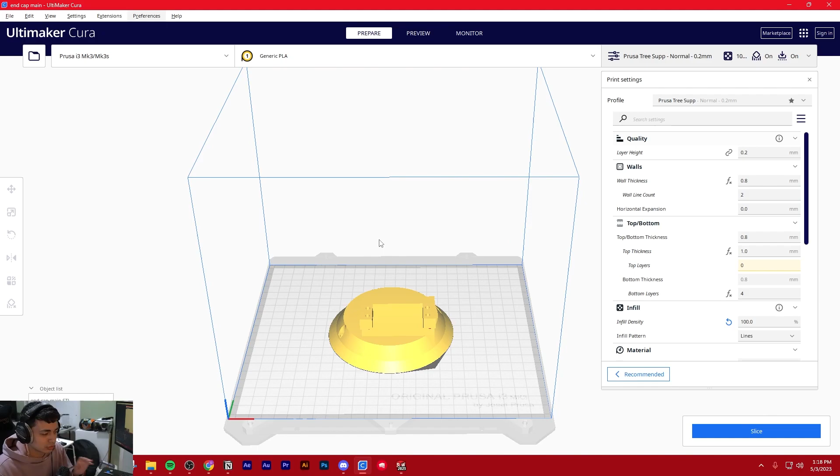All right, so I'm gonna go over all of the basic settings that you need to understand to be able to 3D print properly. So in Cura, once you're all set up, there are these three lines. If you click this down arrow, then there are these three lines here. This is basically showing you how many settings you want to see.

So if you don't want to be overwhelmed by all the settings, because there's a lot, I usually keep mine on all. But if you don't want to be overwhelmed, you could just click to basic. But just in case you don't know, I'm going to run through all of the basic settings so you guys understand. So probably the most important is layer height.

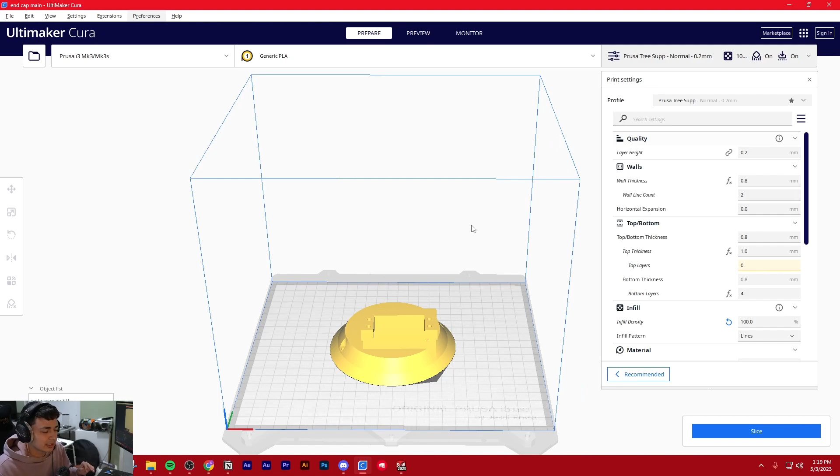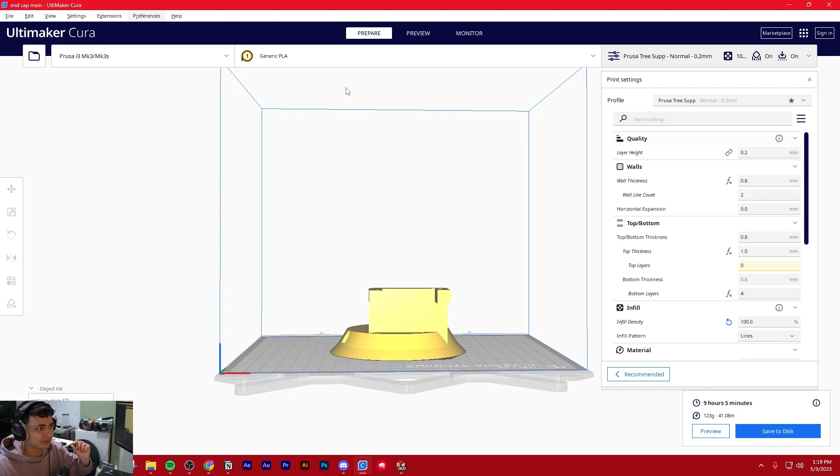So layer height is basically, if we're looking at this part from my Killjoy turret project, from the bottom all the way to the top, layer height is basically the thickness of the slice in the Z direction that you want your printer to print at. So smaller layers will basically give finer detail and make your part look nicer. Layer height will change all of these different slices.

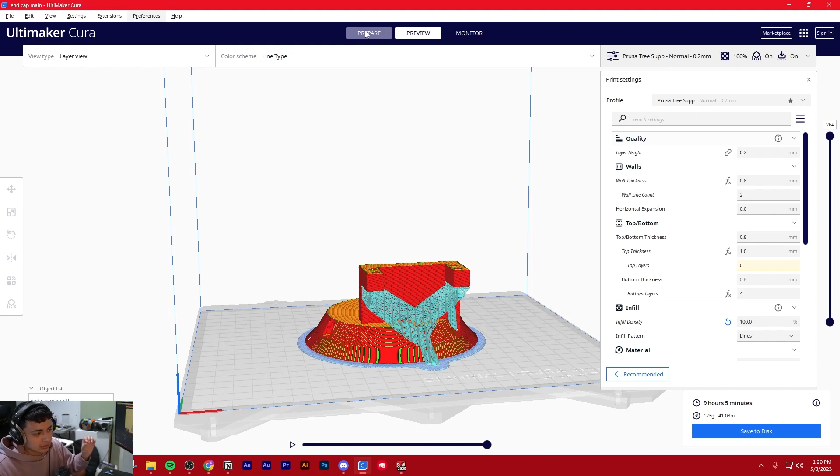So a larger layer height means that it will require less layers to slice up your part and it'll print faster, but the quality will be worse. And then the opposite is true. Lower layer height requires more layers, so it'll take more time to print. That is the biggest contributor to the quality of your part.

And then there's wall thickness. This is based on your nozzle settings, so I'll go over this a bit later. Infill density. So I usually keep mine at like 15%. 15 to 20% is pretty good for any run of the mill part. It'll get you by with 15%. You don't need to be printing super high infill.

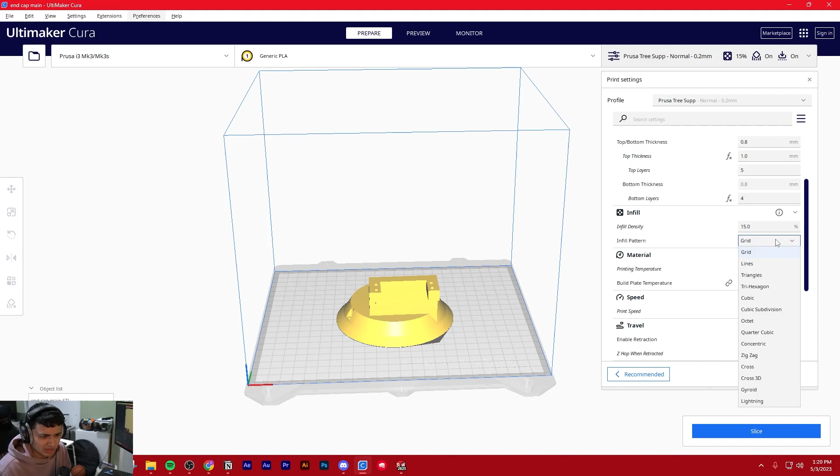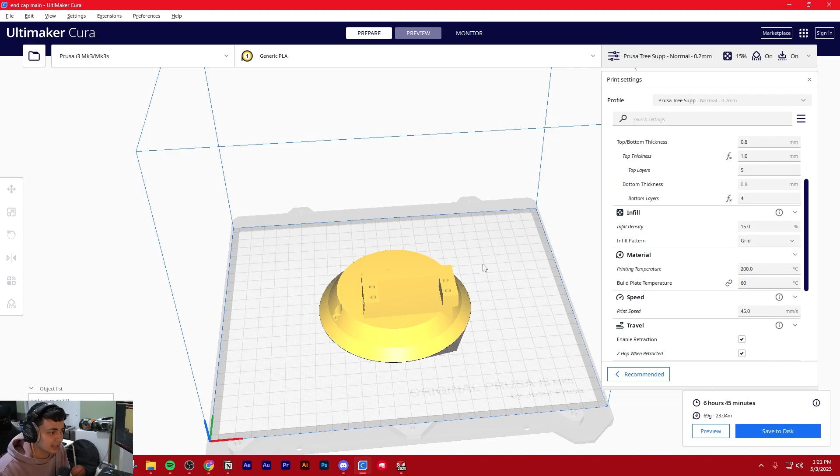You can save material and you could also play around with the different infill patterns. I just normally have mine on grid, but they have all these different sorts of infill patterns. So let me explain that to you just in case you don't understand what infill is. So basically in 3D printing, to save time and to save material, the slicing software Cura will keep a solid outside, but on the inside, where normally it would be solid plastic, it'll subdivide the part, so you see this cross hatching.

Instead of printing solid material on the inside, it'll print a certain pattern that is depicted by this infill pattern here. And there's all different sorts based on if you want it to be normal or strong in every direction. I think zigzag, or there's a 3D version that supports stresses in all different areas.

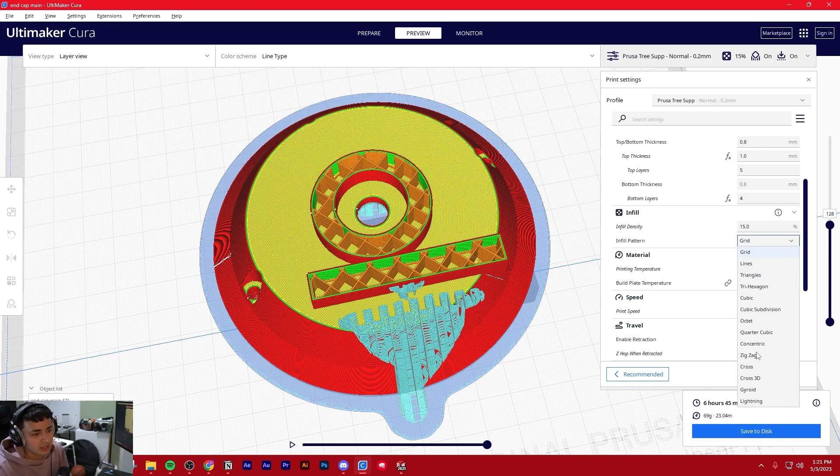There's ones that just look cool while it's 3D printing, and you could play around with all these different patterns and pick one that you want. I normally just keep it on default settings and put it on grid. But that's what's going on here. So Cura is trying to give you a depiction of how it's printing at each layer.

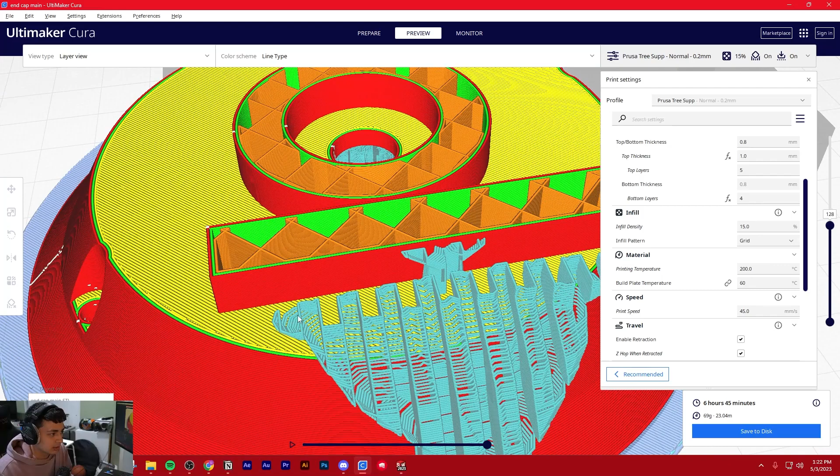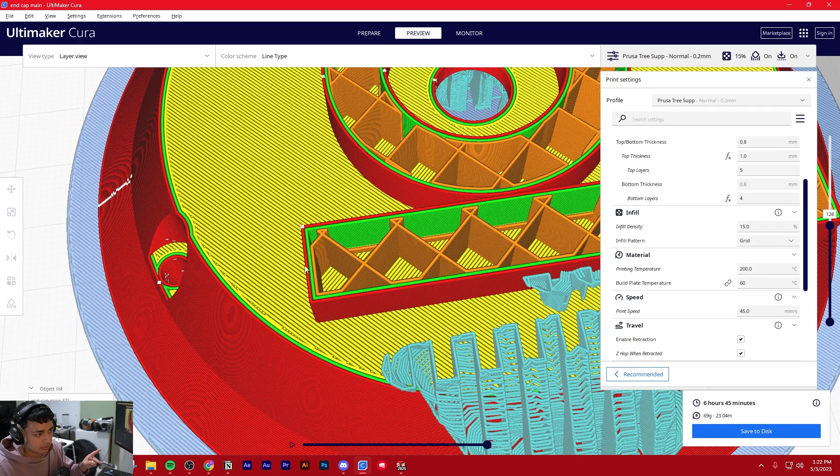So the blue stuff that you see here is the support, and then the red stuff is the outer wall of your part. So right here it's saying it's going to print two walls. Each perimeter around a piece is a wall. So the red perimeter is your outside wall, that's one wall, and then the green wall is your inside perimeter. So you get two walls, and that's based on your nozzle diameter.

So if you're printing at a 0.4 nozzle diameter, which is what default is, then your walls are going to be 0.8 millimeters thick, because that's what this is here. So you have two walls printing at a 0.4 millimeter nozzle laying right next to each other. So that'll be 0.8 millimeters.

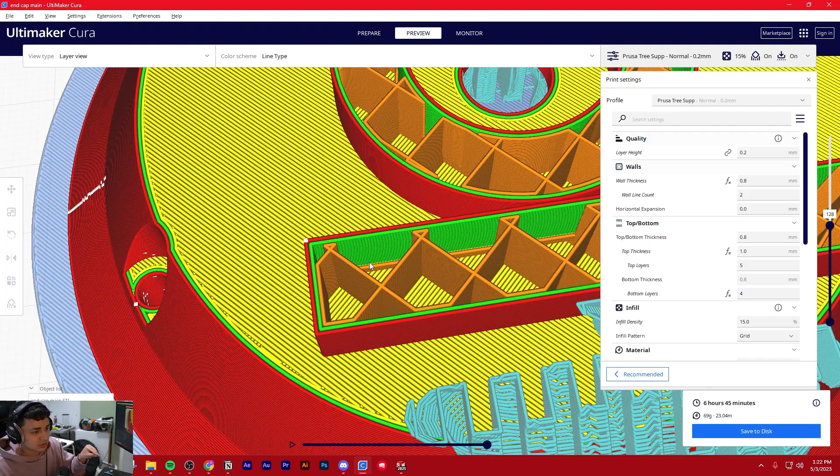And then instead of printing solid on the inside to save material and increase speed, it's going to print an infill pattern. And the higher infill that you print at, the more dense, or the more plastic there will be on the inside.

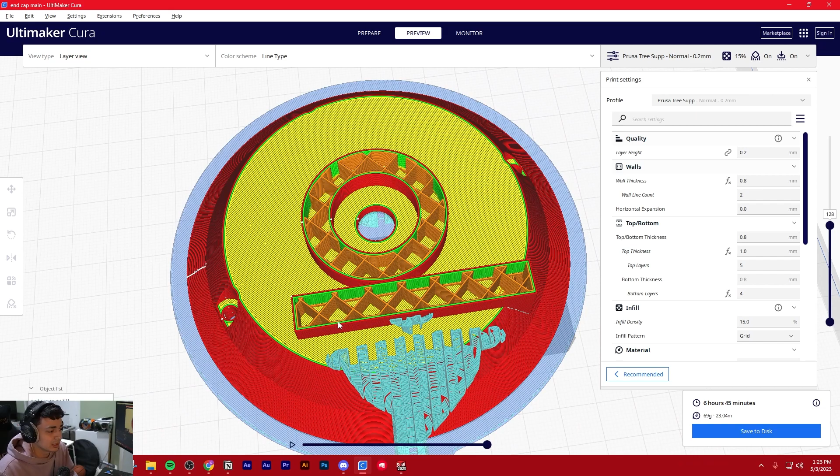Unless you're doing something where you need a super strong part, then maybe print at a higher infill. Sometimes, very rarely, I'll need a really strong part, so I'll just put it on 100%. But otherwise, you're pretty safe to run at 15 to 20%, and that's a good way to save weight too, if you need a lightweight part.

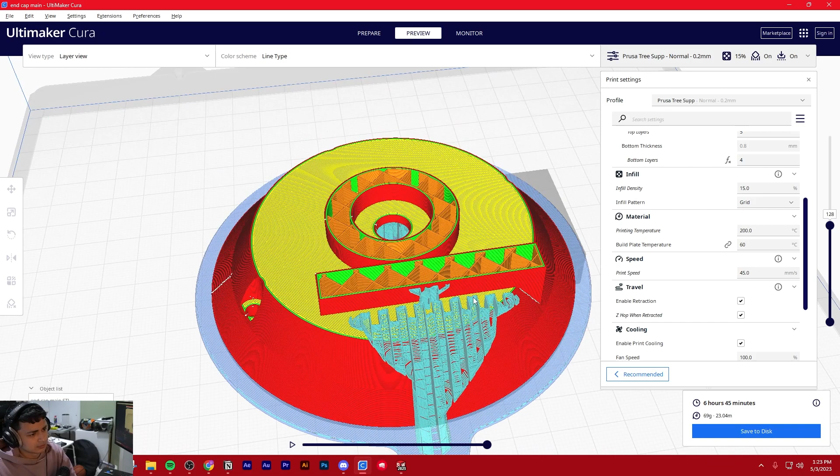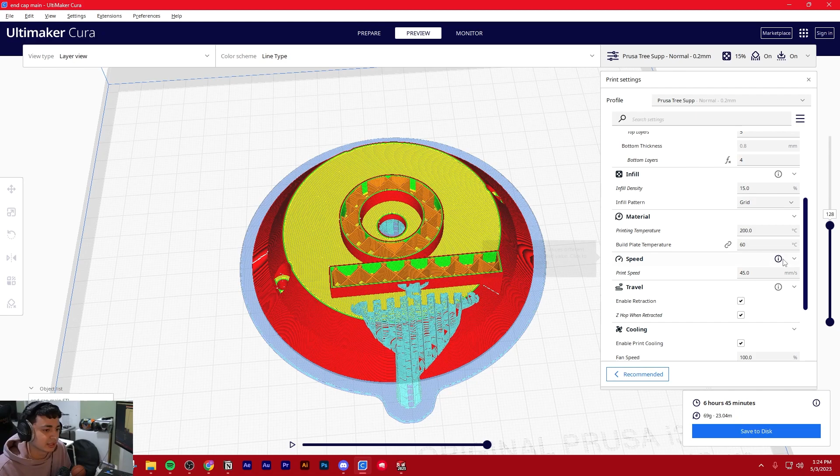What else? Printing temperature. If you're printing normal PLA at a 0.4 millimeter nozzle, 200 to 210 degrees C is pretty run of the mill. If you're experimenting with materials, usually it'll say it on the box; every manufacturer is different and will recommend different temperature settings. I usually keep my bed at 50 to 60 degrees. That's normal for PLA.

I don't really touch print speed. In my experience, the default is pretty good, and although you can increase it, in my opinion it doesn't affect speed that much. In my experience, it would only really decrease quality. The biggest impactors for speed are if you can raise the layer height and how many walls you're printing, which I'll go over in a sec.

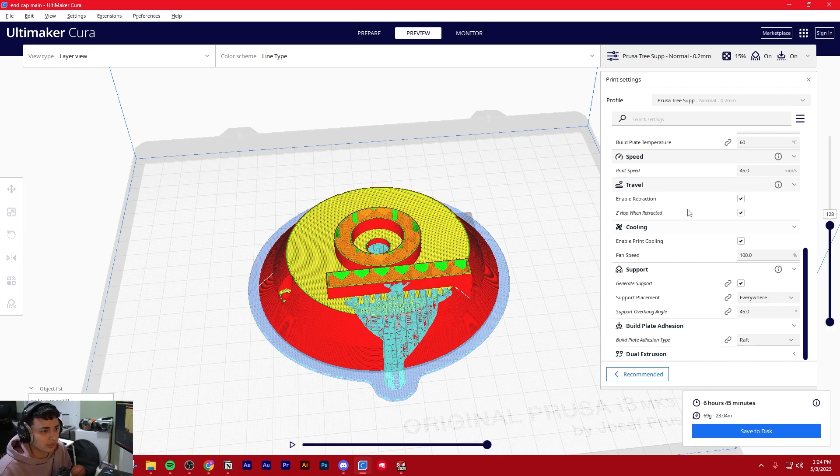And then support. Oh, sorry, I skipped something. Retraction. Make sure you have enable retraction and Z-hop when retracted checked. So basically, say for instance the print on this layer goes all the way around this. Let's say the nozzle starts where my cursor is. It goes left, down, right, up, and now it's got to do a layer on this circle.

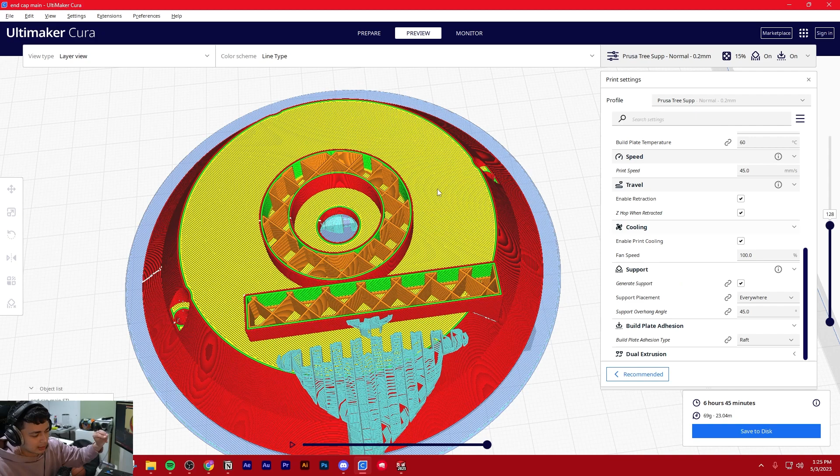So if the nozzle finishes at this corner once it goes all the way around, it will stop depositing material, pick up off the build plate, travel quickly to the circle, plop back down, and start printing again. So that's what retraction is: stopping the depositing of material, pausing, and then quickly moving.

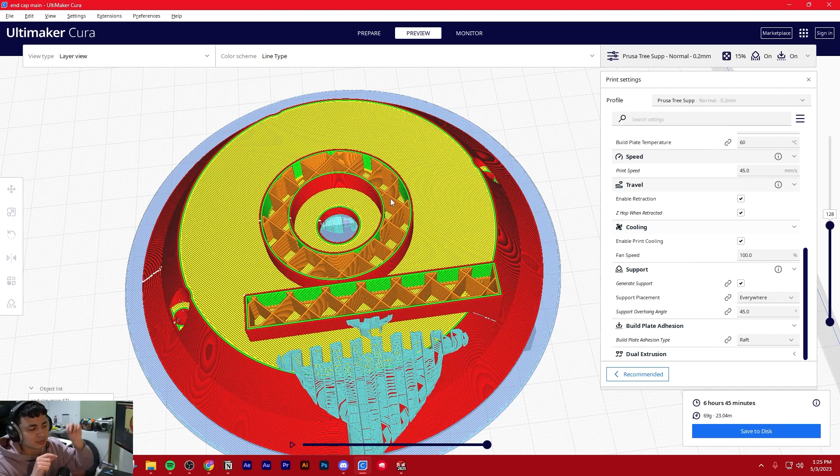Sometimes if you don't have retraction and you just try to drag over to the next area you need to print, you'll get stringing, which is basically leftover material from the nozzle because it still thinks it should be printing, and it'll seem spider webby. So retraction greatly increases quality, and Z-hop when retracted also helps too. That'll pick it off the surface, go to the next spot, and then move back down and deposit.

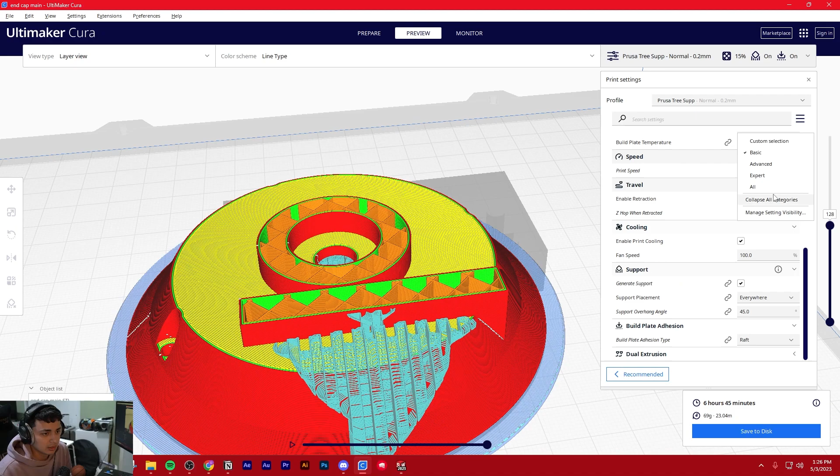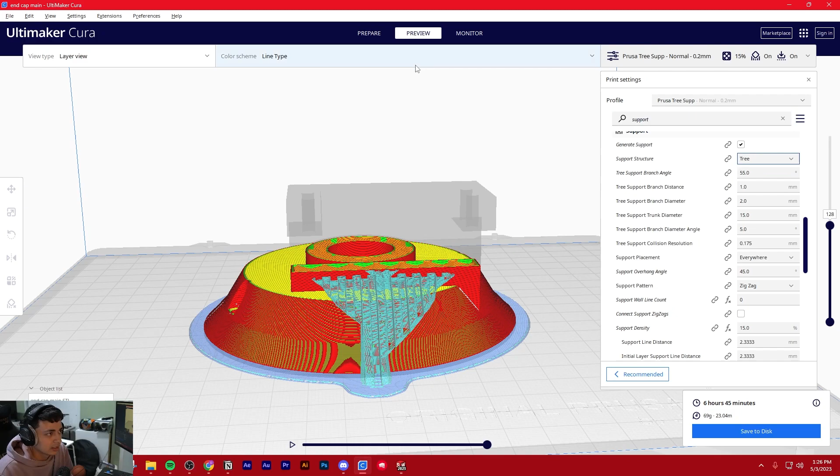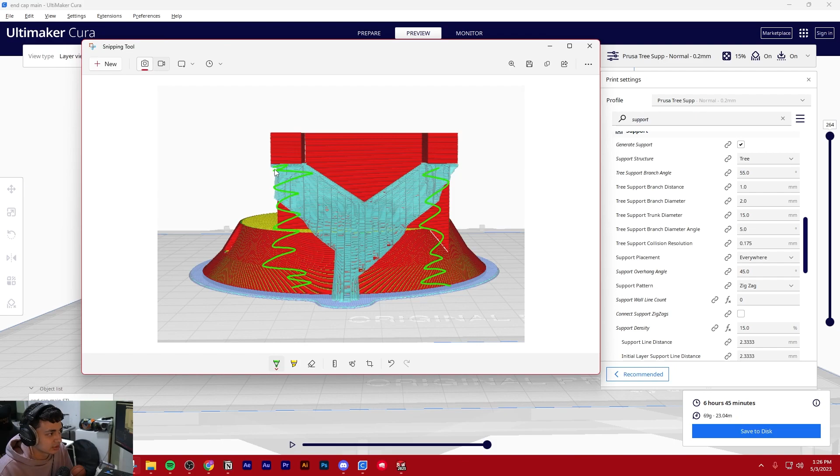Generate support: I always use support, and specifically Cura is great because you can use tree supports. So if you press all and then go to support, you can set support structure to normal or tree. You see how this is literally kind of like a tree branch. Here, let me take a screenshot. Normal support would print material below anything that has an overhang, so probably all of this would get support, and all of this.

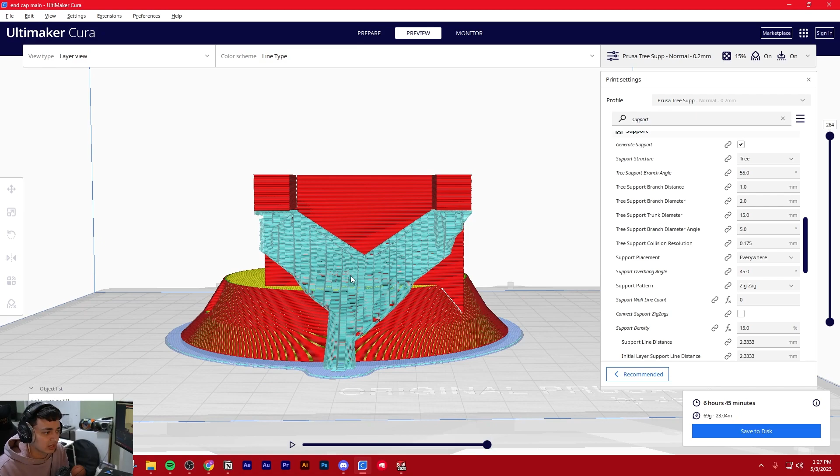But with tree supports, it tries to do the math to figure out the minimal amount of support it needs, because you can print at angles with 3D printing with no issue. So it's saying, if I do a little base here, come up, and print at this 45-degree angle, that'll save a lot of material because I don't have to support directly under the areas that need support. It can combine supports in different branches so they come together.

Tree supports are also really great because if you do them the right way, they just pop off. Sometimes with supports, they'll be too close to your part and won't want to pry off. But I love tree supports. You might have to do some fine tweaking to get it the way you want. Here, let me see.

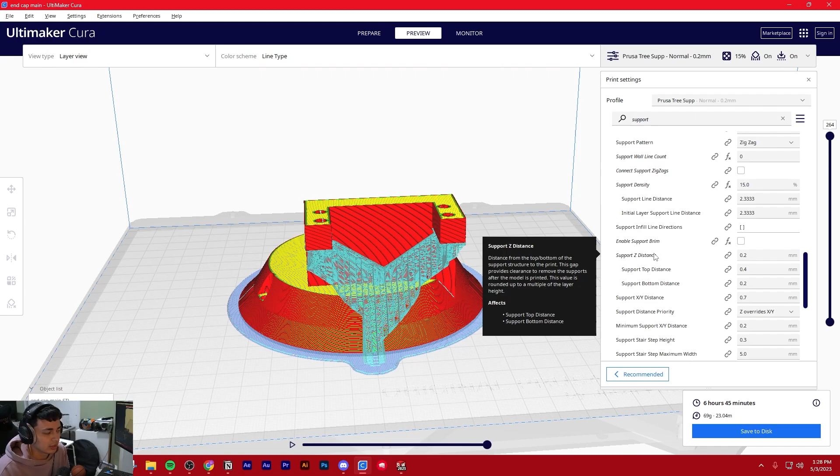So this is a big one. If your support is getting stuck to your part and it's not coming off too clean, support Z distance is a big one that you can play with. That's basically modifying the...

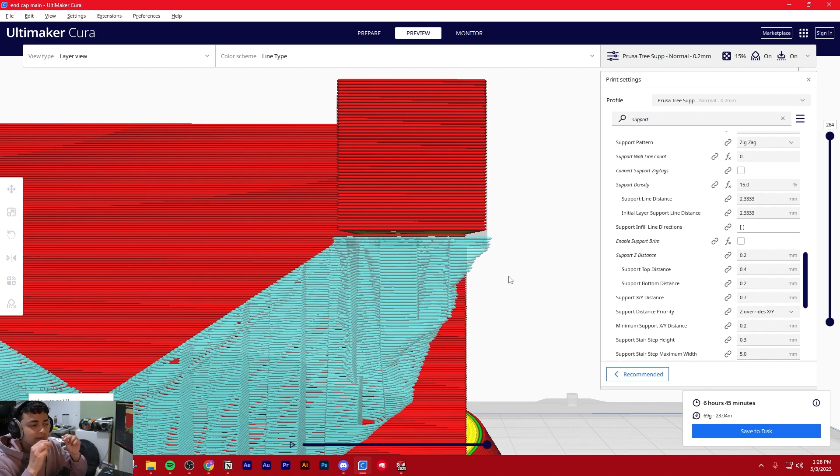So here in the software, it looks like the blue is touching the red part, but if you zoom in, it's telling the printer to not actually put them right on top of each other because they're gonna do that anyways. So you leave a small air gap, and that decreases how much overlap the parts have, so your support can just pry off basically. So that's a good setting to tweak if your support isn't coming off too well.

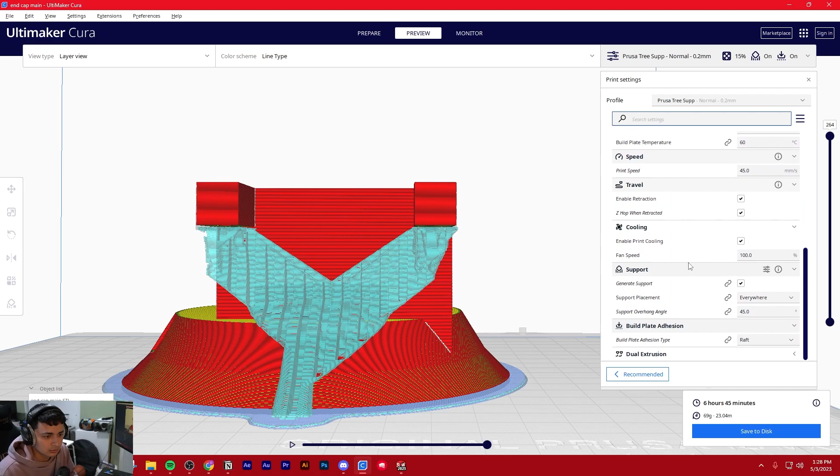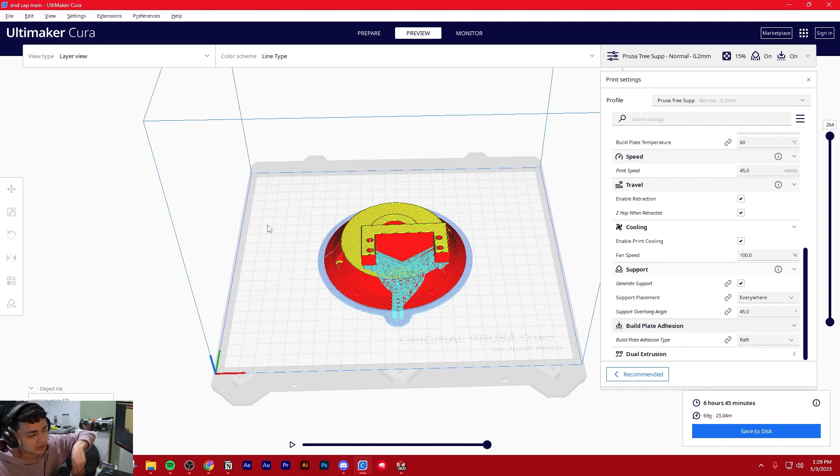And then from there, what else do I use? I'll go back to basic. Deselect support. Oh, and then I use rafts. So what rafts are, basically when your printer's warming up, once your nozzle gets hot enough to start depositing material, it'll move around and maybe do a few strokes, just let out some material to clean the nozzle, make sure it's ready for printing.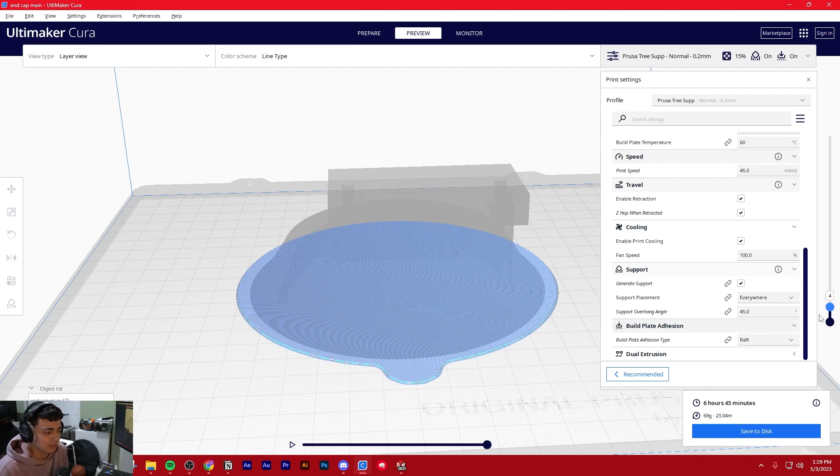But after that, I use raft. So raft is basically this mat. Before my part even starts printing, it's just these couple layers that form a perimeter around your part, and it's a raft or a mat, and it's just sacrificial layers that will help your part adhere to the build plate. A lot of people use glue stick instead of rafts, but it's kind of messy. I like using rafts. I've never had an issue with it. It really helps my parts adhere to the build plate.

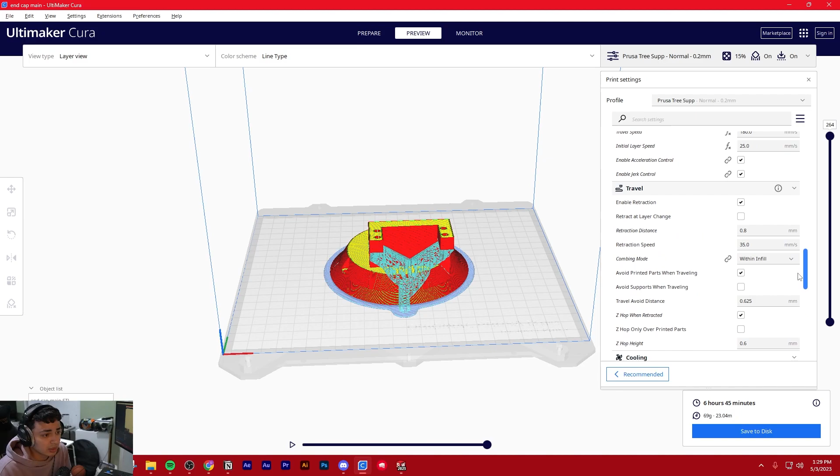What else is there? I'll just go to advanced, make sure I'm not missing anything too important. That's basically the gist. Those are probably the most important settings that you'll need to understand. Obviously, from there, if you're having particular issues, you could ask me questions, and I could help you fine tune things, or you can go in and experiment. Like, oh, what does changing this number do? Maybe you can figure it out just by the slicer. You can test print it and see how that works. But those are probably the most important settings to go over.

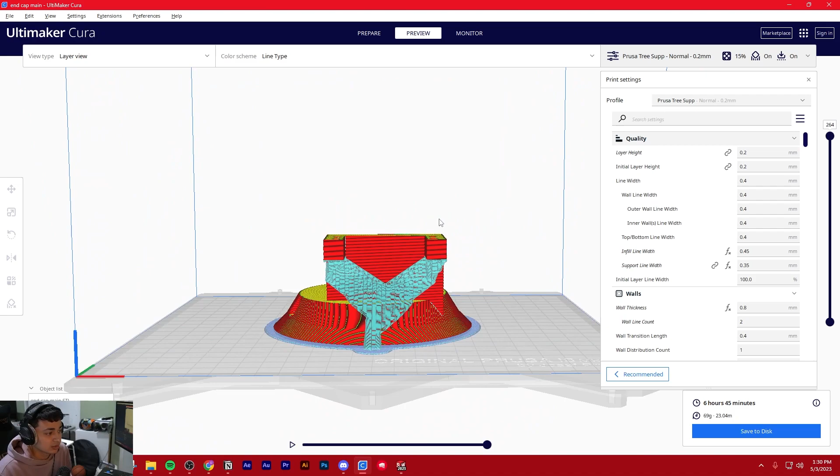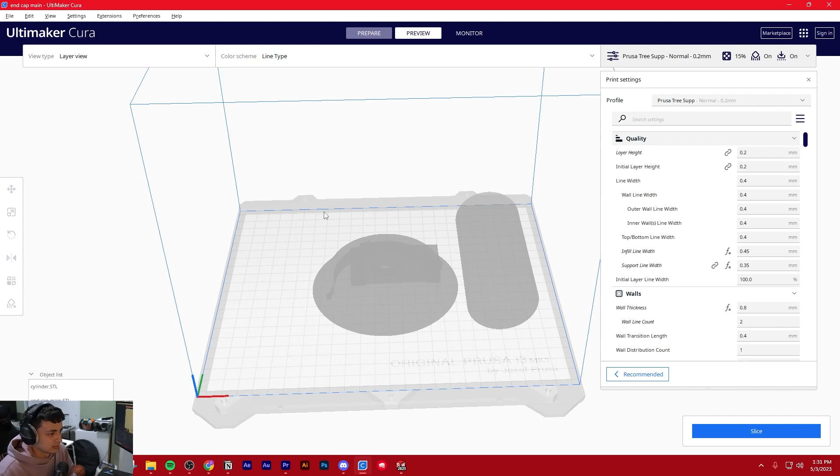Oh, and then the last thing I wanted to show you is, I've made this folder of modifiers, is what I call them, and they're basically just cylinders, and I have a cube. I'll just bring in the cylinder, and then I'll resize it and move it to where I want and make it smaller. Sometimes for my projects, I'll use thread forming screws, right? What that means is the screws will bite into the plastic and form their own threads. But to do that, you need enough plastic for the threads to bite into. Let me explain what that means once this slices.

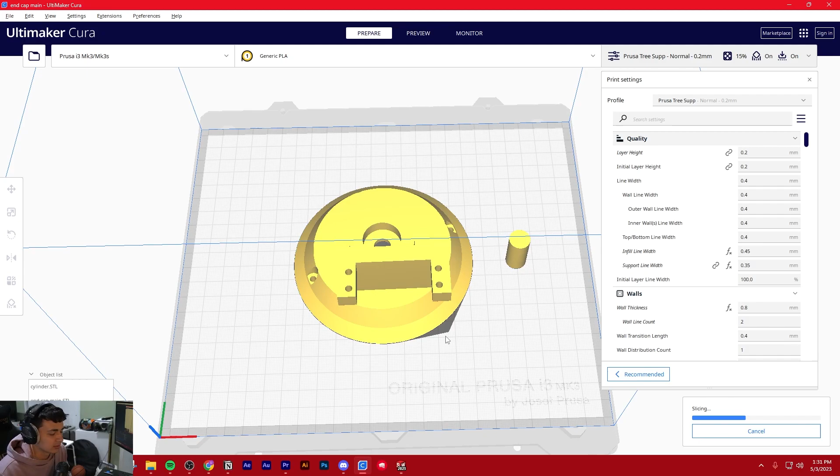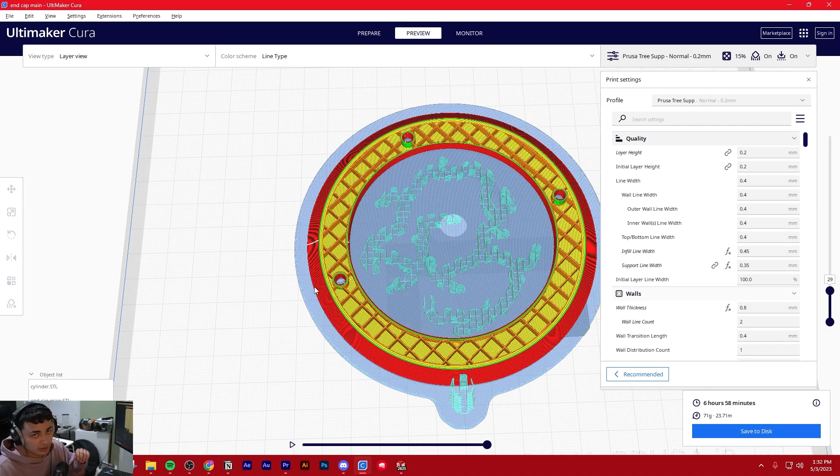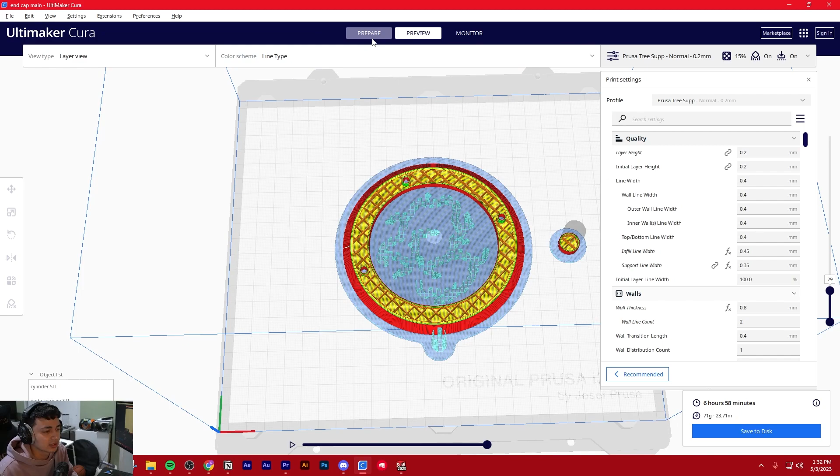So for this particular design, I have these cylindrical holes here, and I'll be running thread forming screws through there. So they're going to be biting into the plastic and taking away plastic to form threads. But here, I only have, what is this? One, two, I have 2 walls at a 0.4 millimeter nozzle. So 2 walls times 0.4 is 0.8 millimeters of material. That's a pretty thin wall to take plastic out of. 0.8 millimeters isn't very thick.

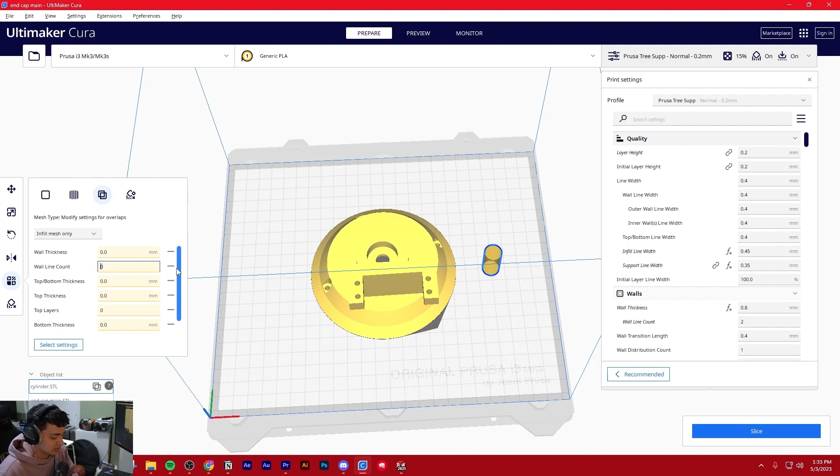So right now, I don't think there's a setting where you can just say, hey, add extra walls to all holes, but there is a workaround. I'll share these modifiers with you if you want to use them in your projects. The way I do it is I'll drop in a modifier and size it to the size that I want and position. Then if you click it, go to per model settings, then modify settings for overlap, and I'll just change this to like 6 or whatever. Now you can see it's sort of translucent. Drag it to the position that you want it.

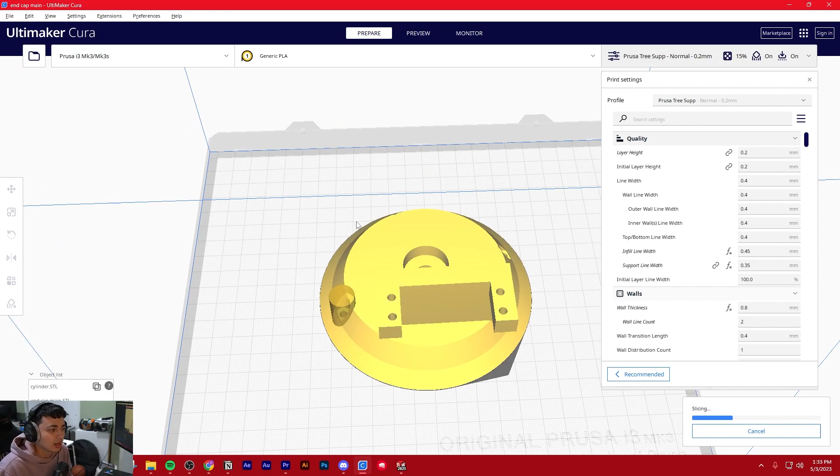So now anywhere that this cylinder overlaps with my part, it's going to add extra walls. I'll do that for all my holes where I know I'm using big thread forming screws that are going to take away extra material. I'll use those to add extra walls or extra material so the thread forming screws can take enough material without breaking my part.

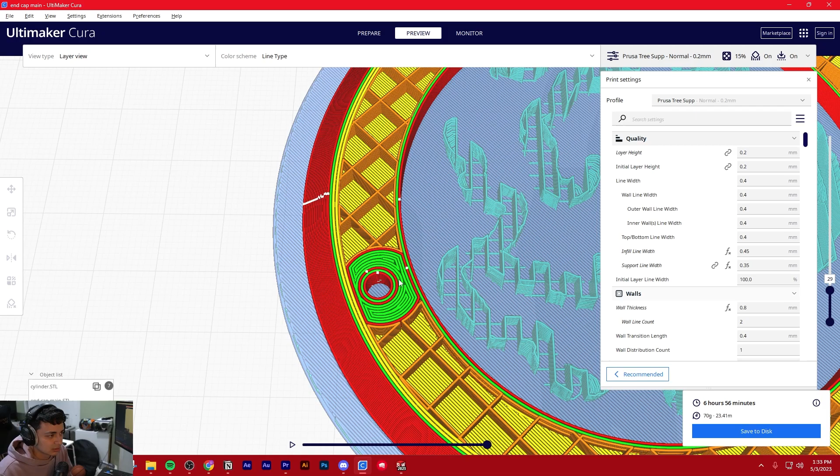So now you see the hole has plenty of walls and plenty of material to take out compared to this one that only has 1, 2, or in some areas 3 walls, some parts have 2. So that's way thinner compared to this. So doing this greatly increases the amount of material you can take away.

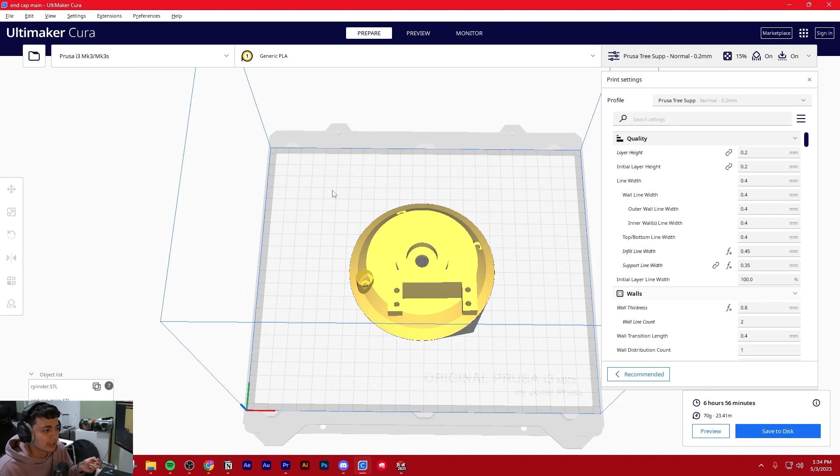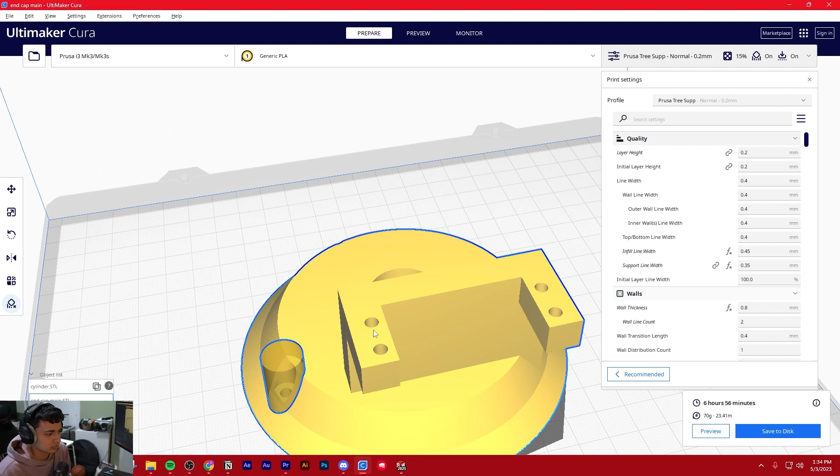And it's also good for heated inserts that I'll talk about in this course, because that's also going to be taking material away by melting hardware into your part. And then built into Cura are support structures. So these are great for blocking material. Let's say these red areas are indicating where support will be.

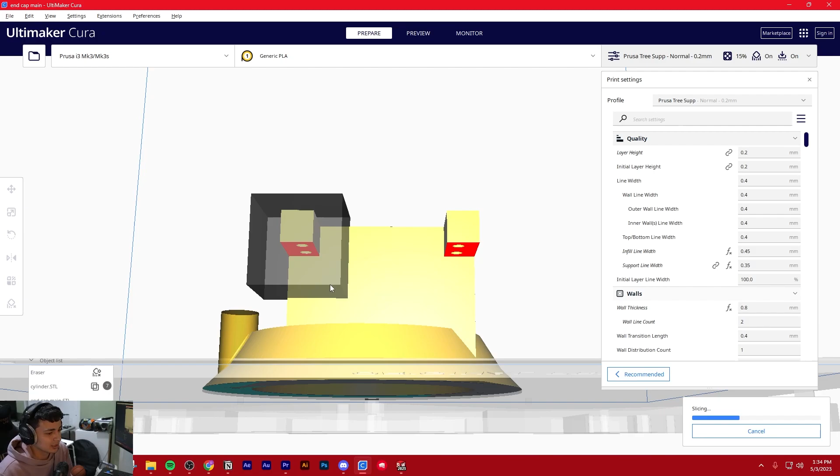I could put a support blocker here, and then if you left click the support blocker, you could modify it like it's a normal part and say, hey, don't put support here. Let's say you wanted that area of the part to be super clean and you knew that it didn't have to be supported anyways, I'm just showing you an example. Cura will then know, hey, let's not put support here, and let's move around that.

So if I look at the slicer now, you'll see there's no support here because we blocked off that entire area, but it did put support over here where we didn't put a support blocker.

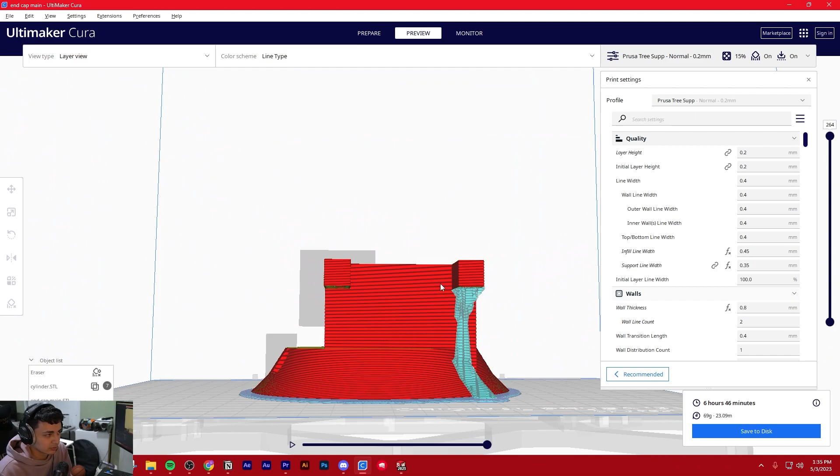Okay, so in terms of print settings, I'm gonna go over two sets of print settings, and I'm also gonna give you my print profiles just in case you have a Prusa Mark III, an Artillery Sidewinder X2, or a CR10S Pro V2. You could just import it and use exactly what I have, but it's nothing too crazy. I've tweaked some stuff, but it's mostly the default after you import a printer into Cura. I'm gonna make this basic just so we're not overwhelmed here.

I'll go over my Prusa. My Prusa prints on a 0.4 millimeter nozzle, and I usually print at a 0.2 millimeter layer height. 20 is a little high; I'll usually print at like 15% infill. For a 0.4 millimeter nozzle, you can do anywhere from 200 to 210 degrees for the nozzle. 60 is about the default that I use for the build plate. Print speed at 45 millimeters per second.

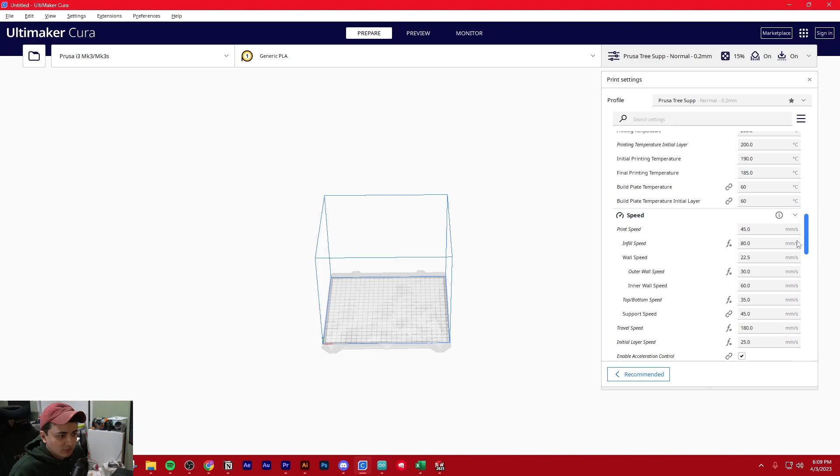I use retraction. I also use support, specifically tree support. So if you go into advanced, and then go down to support structure, you can make tree, and you could copy my settings if you'd like.

I also use raft. So basically when you're printing, instead of printing directly on the print bed, it's going to print a couple sacrificial layers that make a base that your part can stick to. That makes it so that you won't have any issues with your first few layers, and you'll get really good adhesion. So you don't have to worry about your part flying off the build plate, which I love.

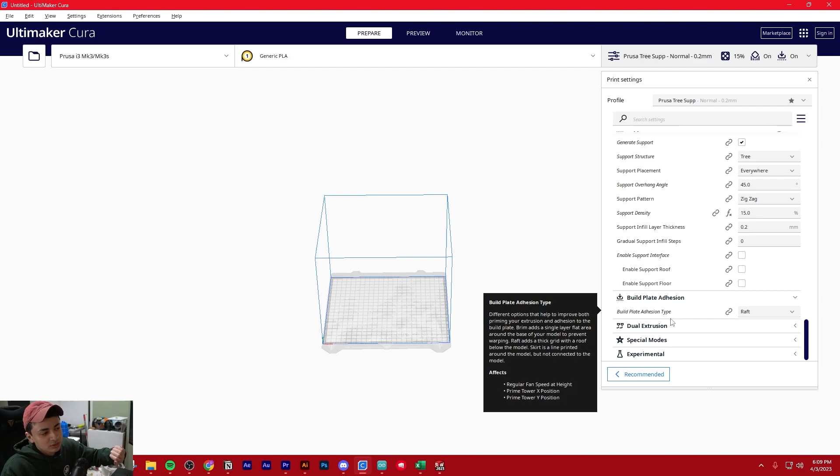But the only issue there is you have to tune in your rafts so that they are easy to peel off your parts. Because if they're not, then you're going to spend time peeling your raft off of your part. But I've spent some time tuning that. Maybe if I go into expert, it'll show my raft settings.

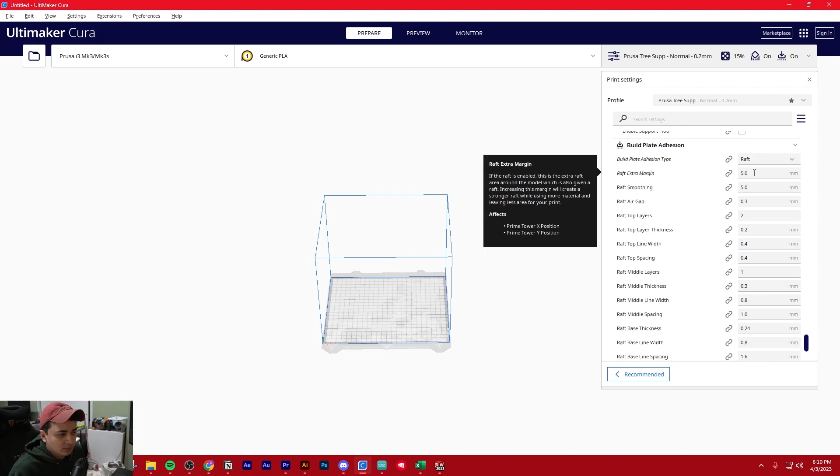So you can see raft extra margin is how much beyond your part it's going to extend. Raft air gap is the big one, so that it'll leave a tiny air gap between the bottom of your part and the top of the raft, so they're easy to separate. So this is a good number to play with to make sure your parts are easy to rip off of the raft. And that's pretty much it. You can fine tune some of this based on whatever issues you're seeing in your prints.

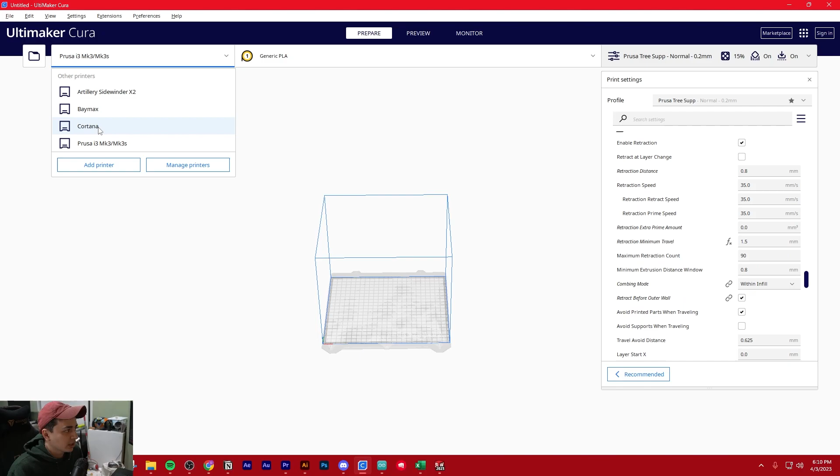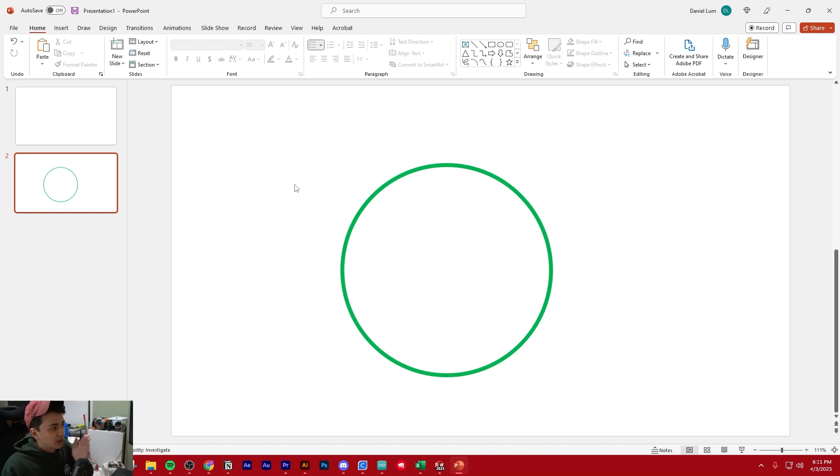But the other thing I wanted to explain was for my two CR10S Pro V2s, they're a little bit larger printers, so I equipped a 0.6 millimeter nozzle. The benefit of that is that I can print faster. Okay, so let's pretend that I have a 0.4 millimeter nozzle, and I'm printing at 0.2 millimeter layer height.

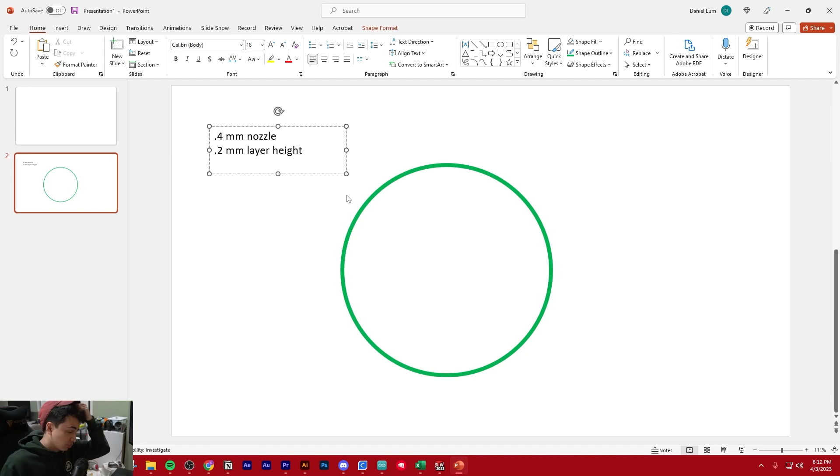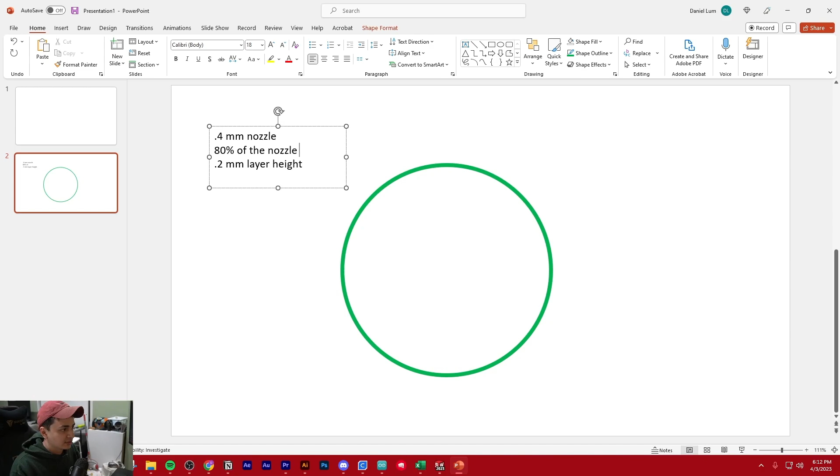So the rule is that, here, how do I do a text box here? So 0.4 millimeter nozzle. I usually print at 0.2 millimeter layer height, but the rule is that, in terms of layer height, at maximum you can go to 80% of the nozzle diameter for your layer height. So if you were printing at a 0.4 millimeter nozzle, the highest you could go would be a 0.32 millimeter layer height.

At maximum. But in terms of a balance between speed and fine detail, I think 0.2 millimeters is really good for 0.4 millimeters. And the other thing too is, if you're gonna increase the layer height, increase in increments of 0.04. So right, this is 0.20. If you wanted to increase the layer height, you could try 0.24, 0.28, or 0.32.

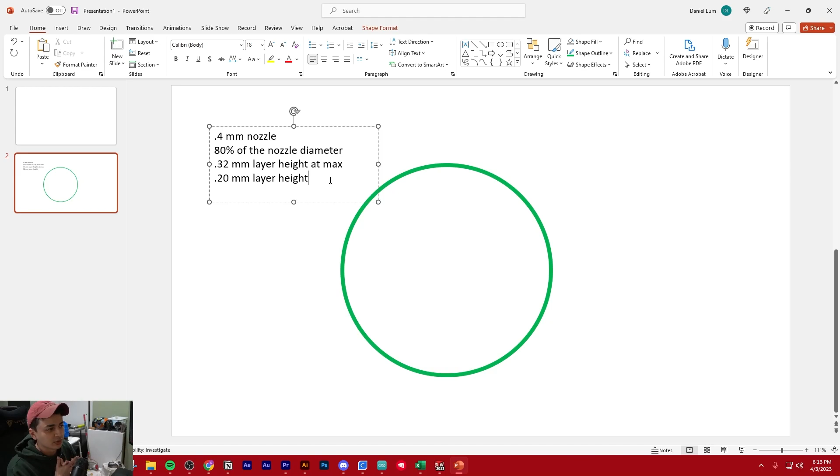There's some magic math that goes on between the amount of steps in the stepper motors or something like that that I've read that allows for those specific layer heights, the intervals of 0.04, to be more optimal for printing resolution. So the other thing I want to explain here is, let's say you're in this scenario, and let's say I'm printing a vase or something. So it's hollow on the inside, but it's got wall thickness.

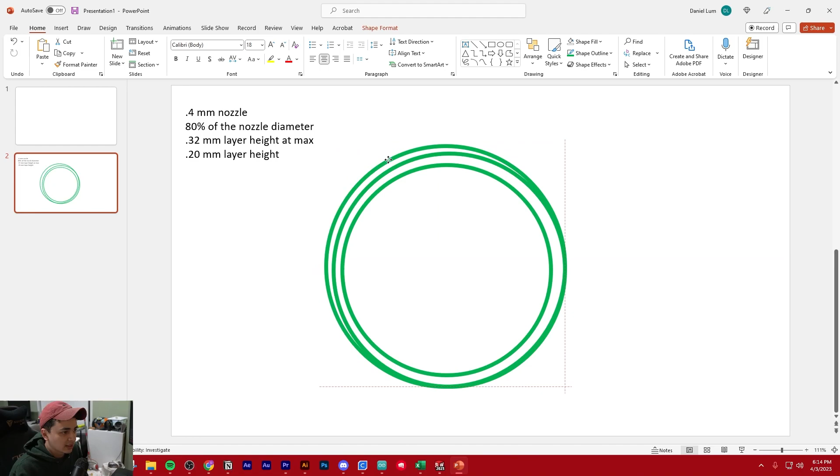So if I were printing at a 0.4 millimeter nozzle, these are called shells, which is basically like if you just had a wall, and the inside was hollow. So all of this on the inside is hollow, and then you have some wall thickness here. For a 0.4 millimeter nozzle, you probably want 3 roads or 3 shells. So basically to make a wall, it would take 3 passes all the way around.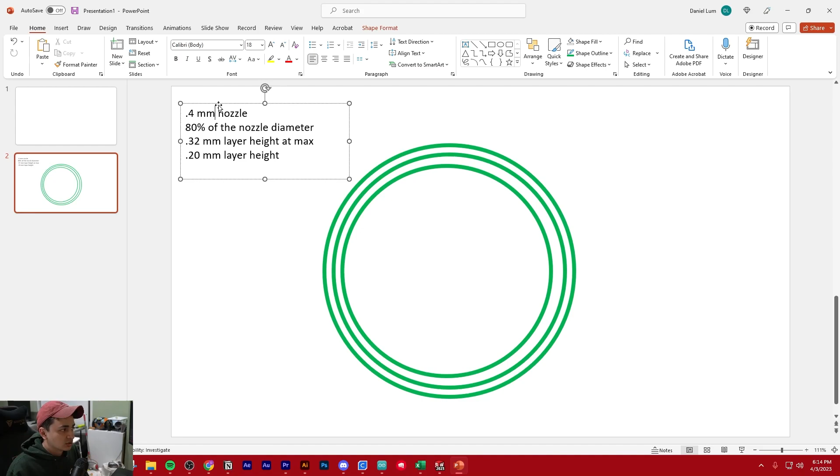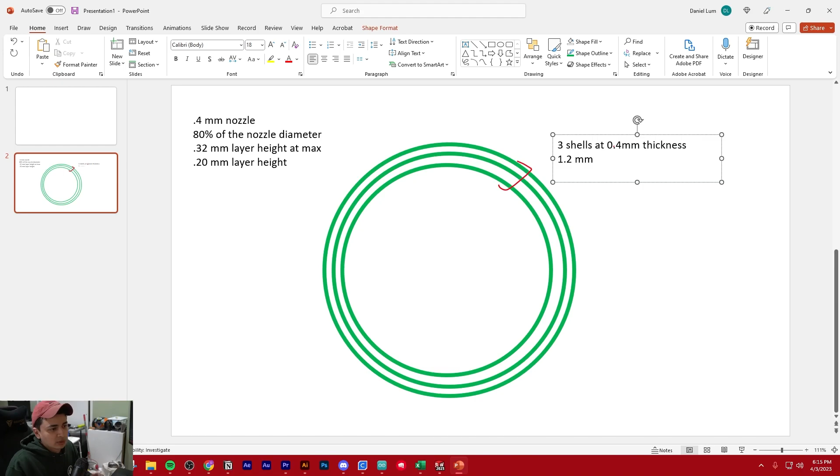So let's do some math. If you're trying to figure out the total thickness and you have 3 total roads or shells, 3 shells at 0.4 millimeter thickness would be 1.2 millimeters. So in this specific example, for a 0.4 millimeter nozzle, I'll usually print at a 0.2 millimeter layer height for a balance between speed and resolution. You could go up to 0.32 millimeters at the maximum.

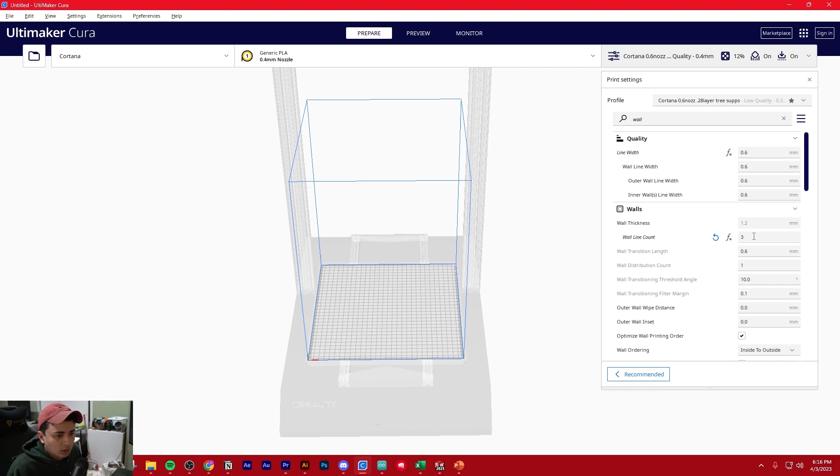But if you're printing at a 0.4 millimeter nozzle, you probably want 3 shells, 3 passes of the nozzle to create a wall at the minimum. So you want 1.2 millimeters total. So I'll show you how to change that. Okay, so here, if you type in wall, you see how it sort of does the math for you, but it's telling you 1.2 millimeters total for the wall would be 3 passes. Mine was on 2, but it should be on 3 for a 0.4 millimeter nozzle. You might be able to get away with just 2 passes, but that's usually the norm.

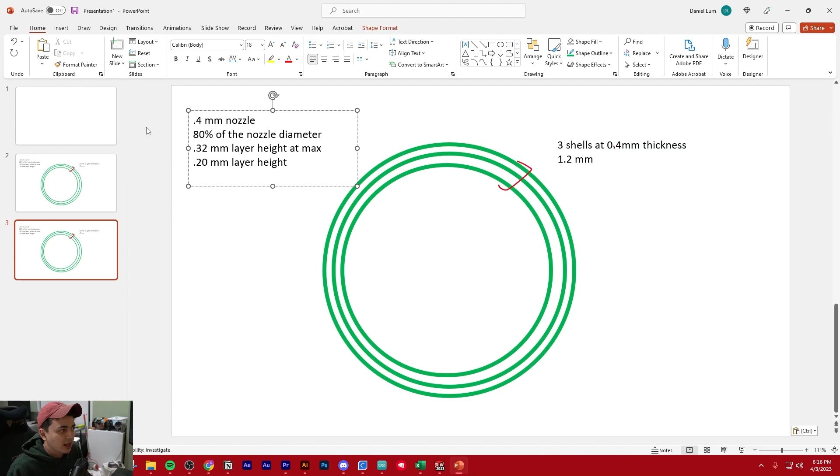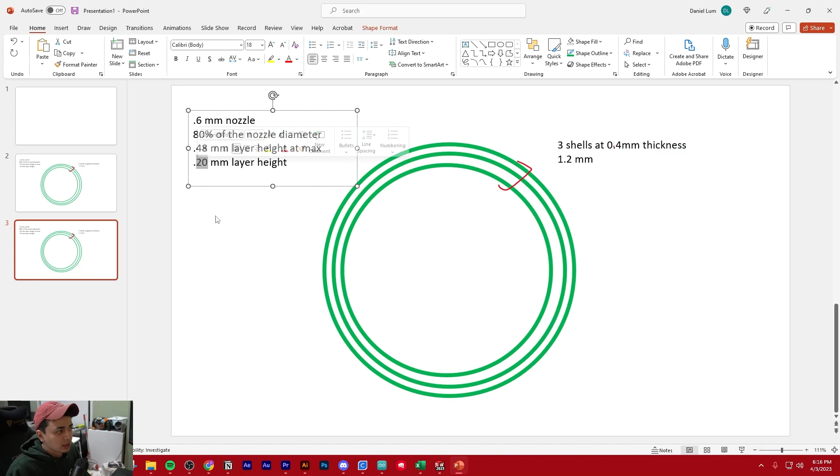But the other thing I wanted to show you was, let me just duplicate this. So this is one of the benefits of going up in nozzle diameter. For my larger machines, I use a 0.6 millimeter nozzle. So what's the new 80% rule? This goes up to 0.48. So the largest layers that I could print would be 0.48 millimeter resolution. Usually I'll print at 0.28 or 0.32. So you have less layers, so your part is printing way faster.

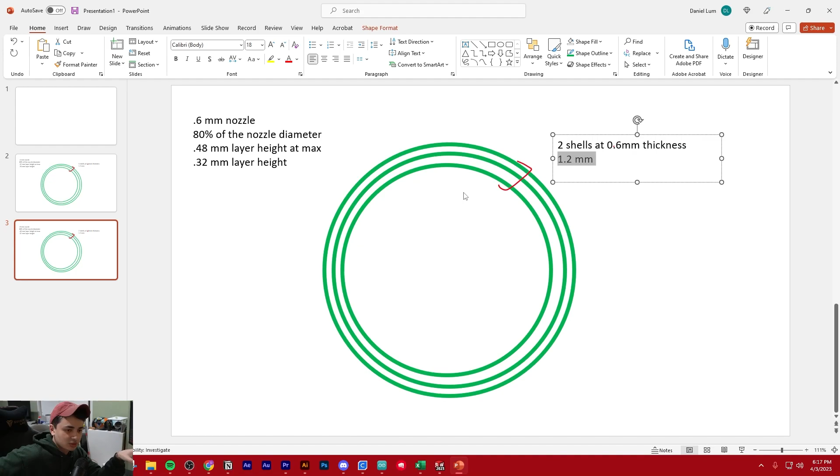And on top of that, the big time saver is now that we're at a 0.6 millimeter nozzle, we only need 2 shells to get the same wall thickness. Instead of a 0.4 millimeter nozzle doing 3 passes for a wall, a 0.6 millimeter nozzle only has to do 2 passes. So think about all your parts that have all these walls. Let's say you're printing a big part. Not only do you have less layers because you can print at larger layers, so it's printing faster up in the Z, but also in the X and Y direction, it only needs to do 2 passes instead of 3.

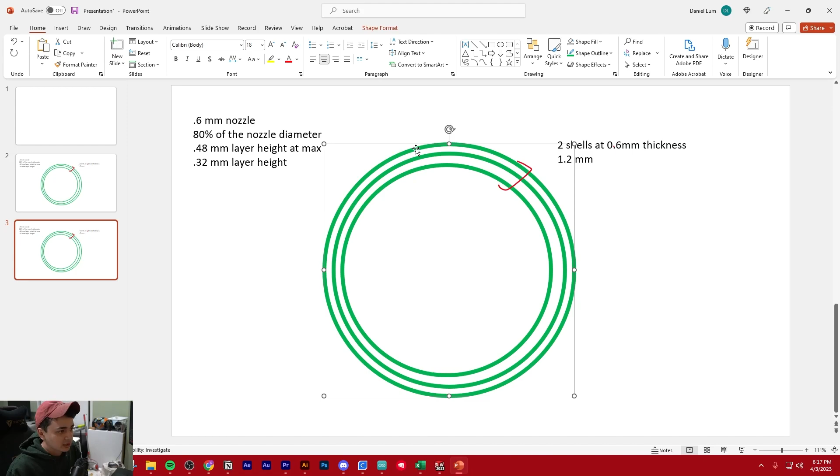So basically one of these rings would go away, and instead of doing 3 passes with the 0.4 millimeter nozzle, you'd only have to do 2. So you're saving in the layer resolution time, and you're also saving in the amount of passes you do for your walls. So increasing your nozzle diameter can greatly increase the speed at which you print, which is pretty helpful.